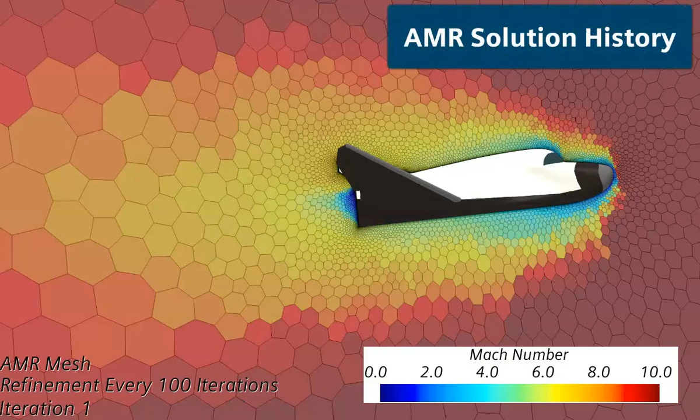Let's get started. We'll first look at the time history of the adaptive mesh as a solution has arrived, starting from the baseline mesh, which will appear in a moment. We'll first look at the Mach number field and the mesh on the vehicle center line as it evolves through a solve. The AMR model on the fly splits cells based on the gradient criteria specified in order to get the shocks and wake features refined to the final mesh, which appears around 1,000 iterations.

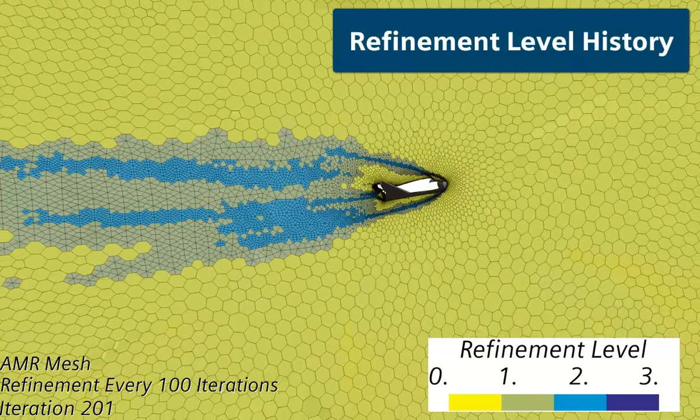We can visualize what is happening by looking at the refinement level field, which shows the number of times that a cell has been split and refined for an analysis. If we look at the history, we can see that the wake and the shocks near the body get refined, and then as the solution progresses and converges, those shock and wake refinements progress out further and further to the far field.

A numerical Schlieren of density gradient magnitude will allow us to see how the shocks progress near the body. As you can see, in the first few hundred iterations, the shock shape evolves, and then the mesh near the body doesn't change much after that.

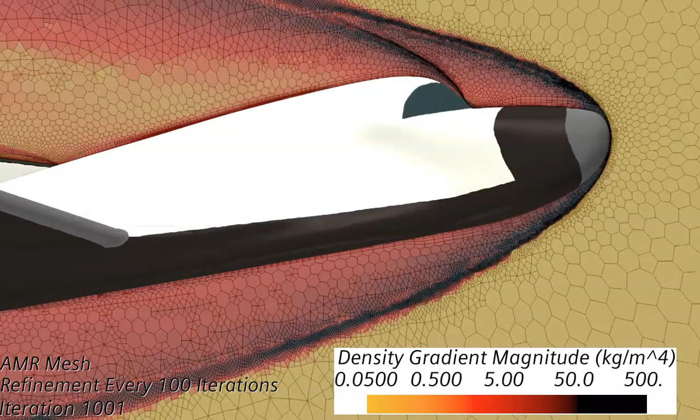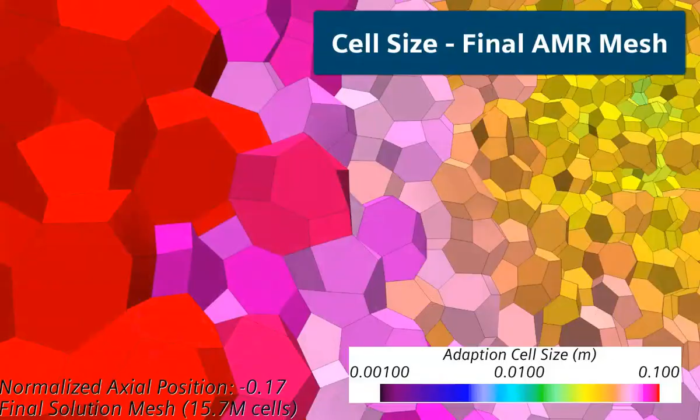We'll now move on to looking at the final AMR mesh of the converged solution at 10 degrees angle of attack. We'll start by looking at the cell size on a plane section as it moves axially back along the body. You can very clearly see the black and blue cells that are refined for the shock along the route and off of the body, as well as green, yellow, and other split cells in the wake. Now it'll progress a little bit faster once it gets behind the body.

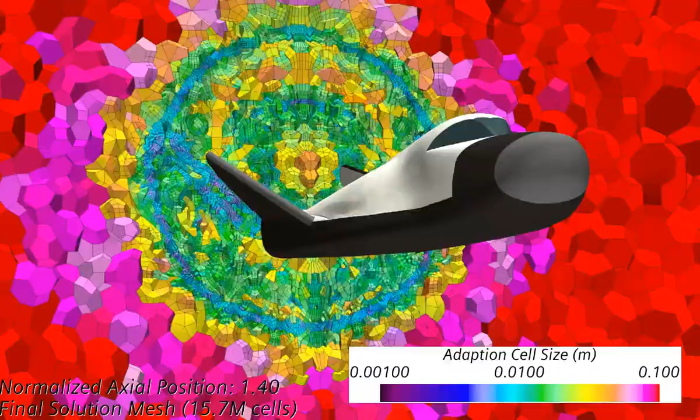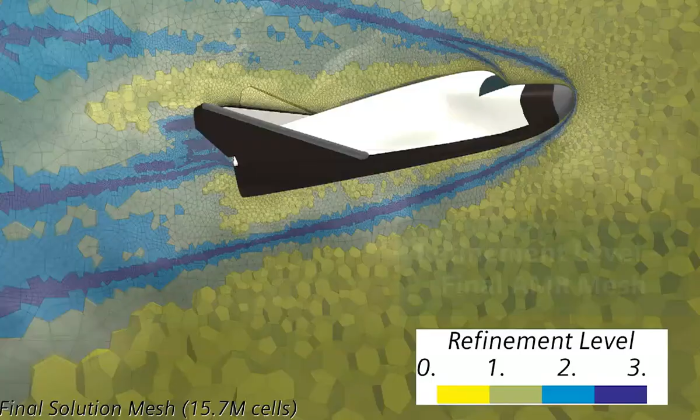Next, we'll reposition and take a look at a spanwise section that's going to come out to show the three-dimensional character. And this time we're showing the refinement level again, where you can clearly see the dark blue regions for the shock and the light blue regions for the wake.

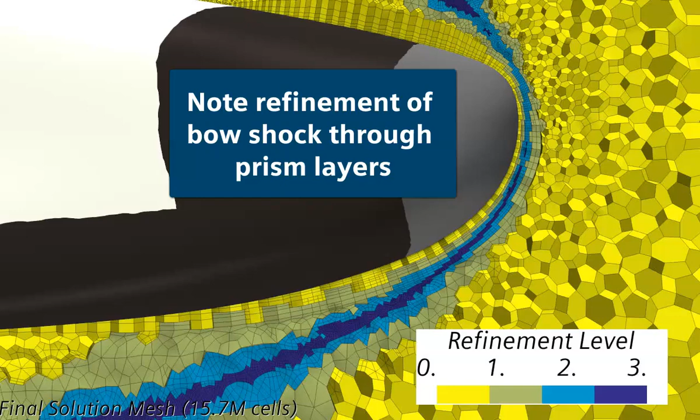If we zoom into the stagnation region near the bow shock, we can see that this refinement continues even into the body-fitted prism layers, allowing a very good, sharp capturing of the shock, evident by looking at the Mach field, where we can see a very sharp demarcation line where that bow shock occurs. If we keep the Mach number field visible and zoom out, we can see the sharp capturing of the shock all the way out into the far field, as well as capturing of the wake.

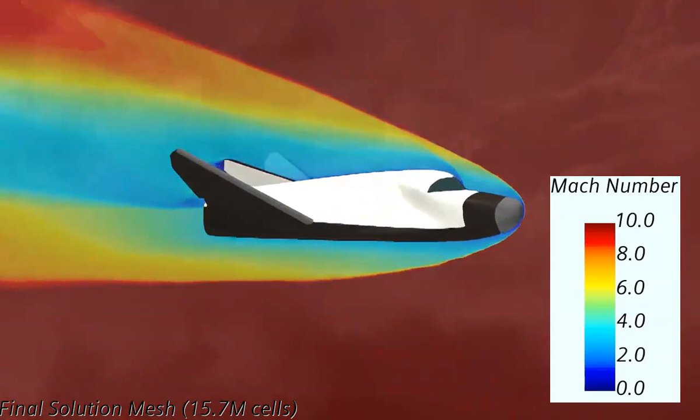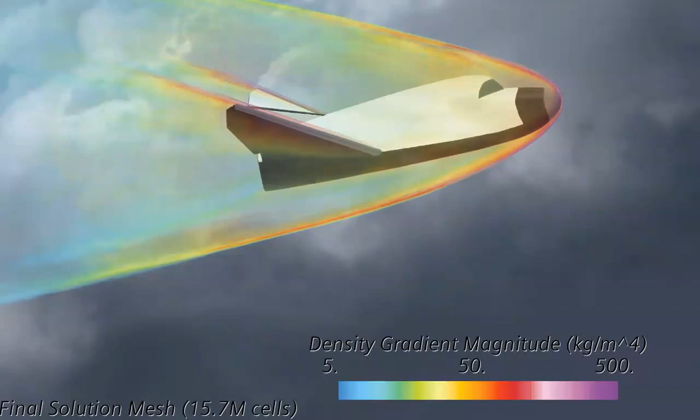The shock can also be rendered three-dimensionally by looking at a volume rendering of the density gradient magnitude, where we can see features of the shock such as shocks from the wings and from the cockpit of the vehicle. A volume rendering can also be useful to look at the regions of high temperature air near the stagnation zone and underneath the body of the vehicle.

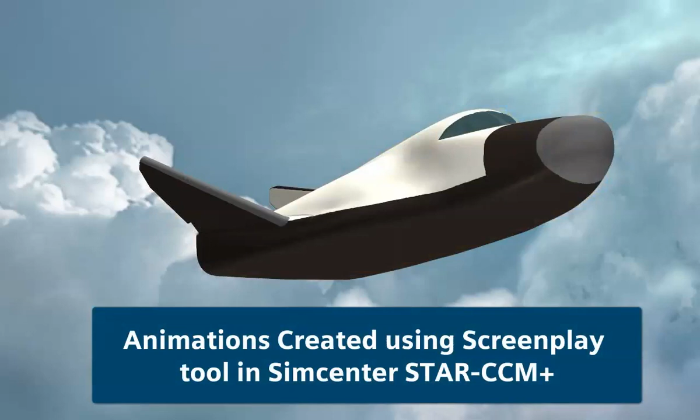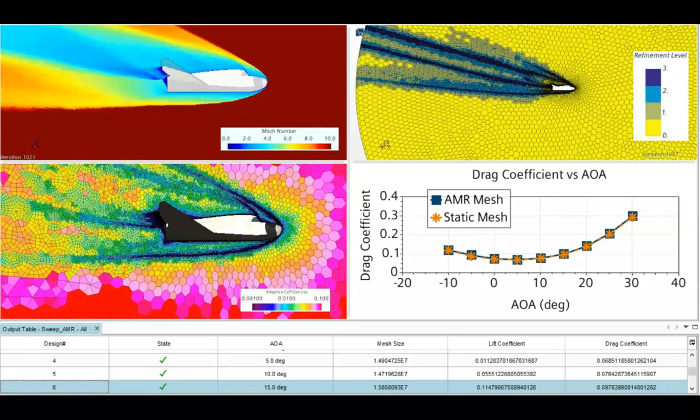Next, we'll move on to look at how adaptive mesh refinement can be used to adapt the mesh to a variety of conditions for an entire angle of attack sweep. Here we have the Mach number field shown in the upper left, the refinement level field in the upper right, the cell size in the bottom left. And as we scroll through the conditions, we can see that the mesh adapts and refines based on the shocks and wake structures for each angle of attack condition, thus allowing a valid mesh from a single coarse baseline mesh for any set of conditions.

The objective of this work was to show the applicability of the AMR adaptive mesh refinement model in Simcenter STAR-CCM+ to hypersonic shock and wake structures.